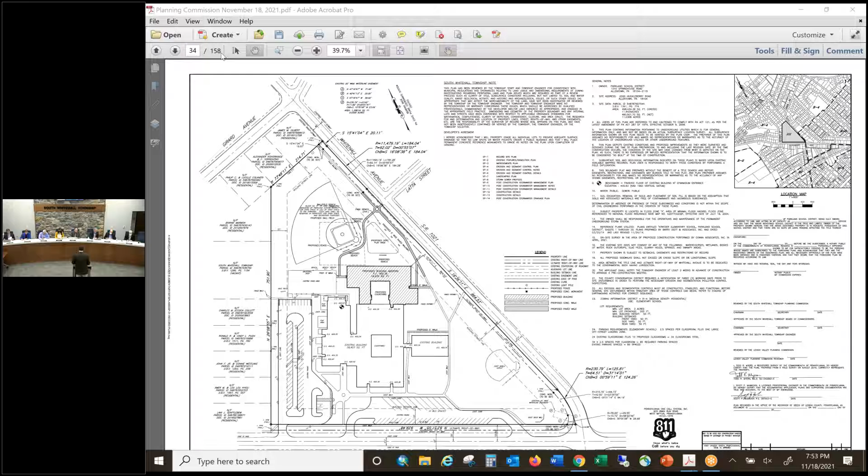Next, we will be doing Long's Water Technology Major Plan 2021-106, request for preliminary final plan review. And we'll start with the staff presentation.

This is an application to further develop the property located at 1567 Hausman Road. The plan proposes the razing of all existing structures on the lot and the construction of a 5,600 square foot commercial building, a 14 space parking lot, and associated stormwater management facilities on the 1.2833 acre lot. The subject property is served by public water and sewer and is zoned highway commercial.

Carroll and Warwick Inc. is the owner, and Long's Water Technology is the applicant. This plan was reviewed at the September 16th Planning Commission meeting. There was a prior plan approved on this, Major Subdivision 2007-108 Long's Water Technology, all the way back in December 3rd, 2008.

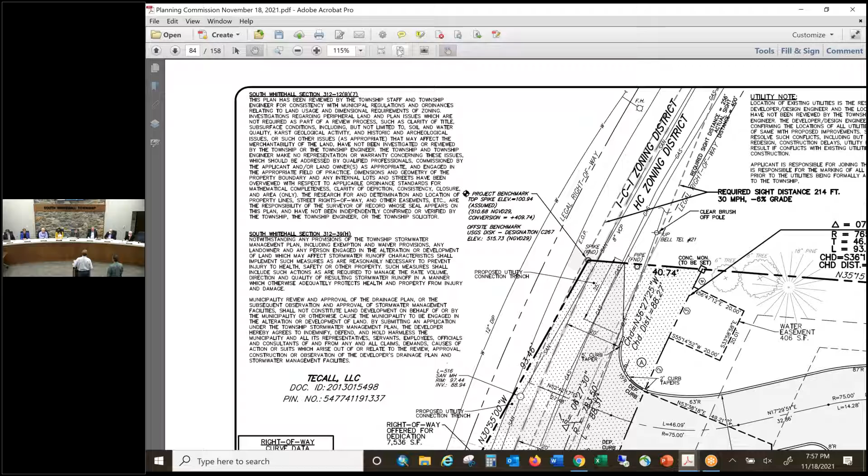You might be aware of that property. We had it under agreement of sale with somebody else who wanted to do something else there. Fortunately for us, that did not go through. I think that our business would fit into that neighborhood extremely well.

It's a much smaller plan. We've known that neighborhood for a long time. Everybody around there knows us. A lot of them are our customers. So it's really a perfect fit for our community, for South Whitehall, for our business. Most of our employees are very local. A lot of them are Parkland grads. We bring people out of the vo-tech. Very nice for the vo-tech kids.

We want to stay. What I'm trying to say is we desperately want to stay in South Whitehall Township. We have a very, very small window to build in there. From a year from now, we cannot be on that property anymore. Not being able to go here will probably, I don't know what will end up for us, where we'll have to go, probably out of the township. I don't want that to happen. And then again, we would have to sell this property, and I don't know what South Whitehall would have to face in the future with that property as well.

So there's a very small window. So tonight's decision, I can't tell you how important it is to us to be able to move forward and get this done. Like I said, I know there's some people here tonight from the area that are behind us, and we would really like to get in there and get that done. We have less than 1 year. I think that covers basically what I wanted to say. Thanks, Sam.

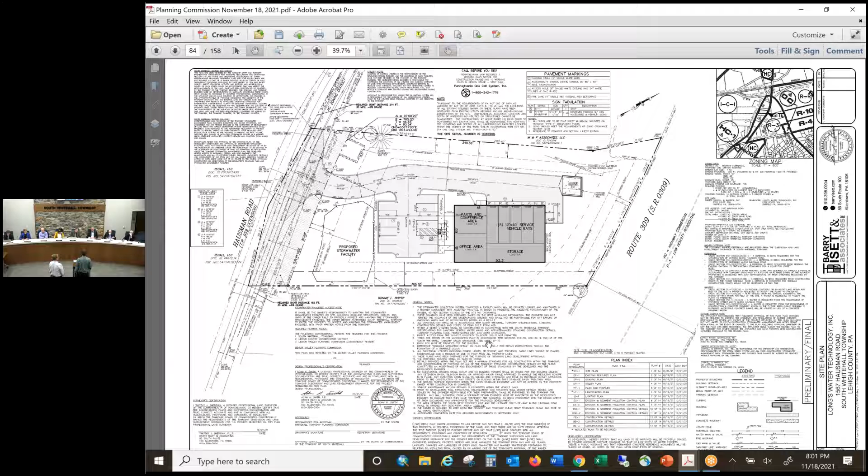We did meet with Greg, Tony, Herb, and David to discuss the project yesterday. They explained that those two main reasons were that our stormwater discharge needed to be angled farther downhill, downstream, as it leaves the property. And also that we put together a future improvements plan that shows where the sidewalk would go and the road widening and the curb and how all that would work with the current plan, that everything would be planned in the future. We did not show how storm sewer would discharge in the future.

Tony asked us to put a plan together that shows if it could work. After that meeting, Jim and I went to the site, looked at the existing conditions, put a plan together showing that discharge, and we sent it to Greg and to Tony for their review, showing that it would work. So I'm confident that we can work with township staff and with the township engineer to address any outstanding comments.

I won't speak for Tony and how he feels about the plan that we sent to him, but I respectfully request conditional approval tonight, conditioned upon, of course, meeting any outstanding comments. I'd be happy to answer any questions you have.

When did you send that plan to Tony and the staff? 9 a.m. this morning. So 11 hours ago. 11 hours ago, yes, sir. And really the purpose of the plan was just to show this is the route that storm sewer could take off of the site to discharge, that there was a feasible option.

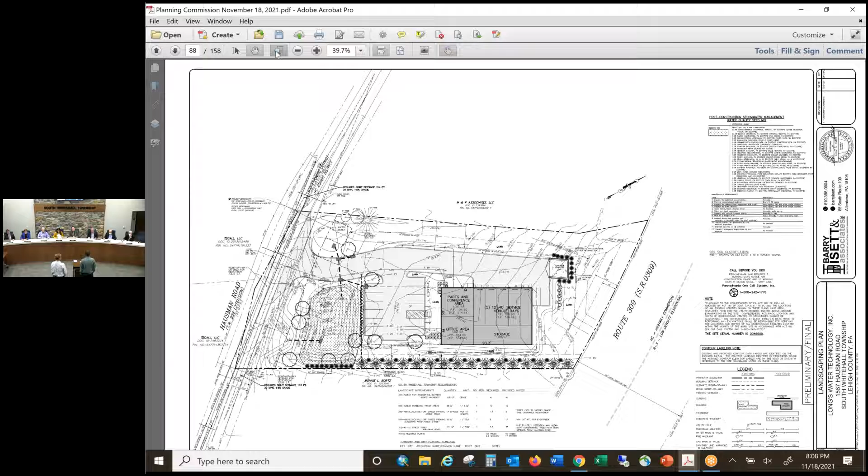So in general, is the planning commission essentially favorable to the plan, the concept, the waivers, as long as the downstream stormwater issue is acceptable? I would say yes, waiting on the engineers. Unfortunately the plan was submitted this morning; we would have had another week and it would have made our packet, and we could have a different conversation this evening.

But I can't speak for the others, I'm very in favor of this project, just getting it vetted properly so we can make a good recommendation to the BOC. And that's where I am too. I think just getting those details done would work, and you know what the schedule is, so work with that.

Any comments from the audience? This is just for this project, just in case you... And to be fair, I'm concerned about your neighbors to the south, and I want to make sure everything works as well, because we're talking stormwater here, so I'm just cognizant of that. We did go over the plan with them. Okay, good, great, thank you.

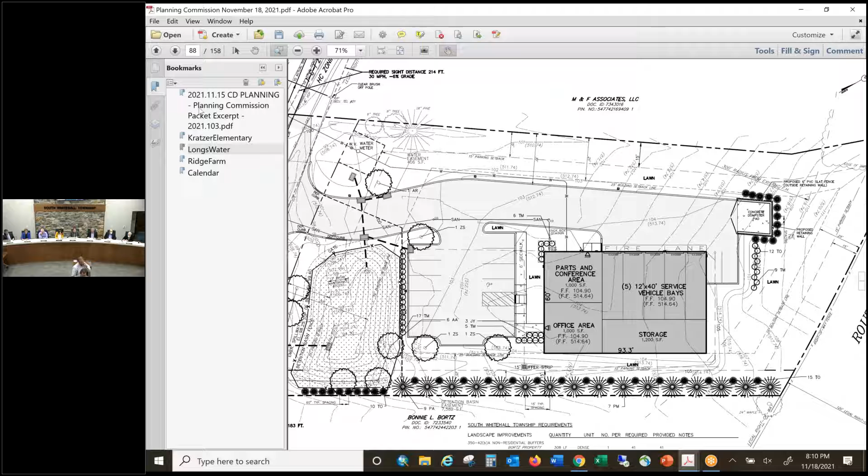Thank you. All right.

The third item today is the Ridge Farm Final Phase Plan, Phase 1A, Major Plan 2017-101, a request for final plan review. Greg will have the presentation. This is an application to develop properties located at Huckleberry Road, pin 548746422139. The plan proposes one 30,000 square foot medical office building, construction of approximately 265 linear feet of Road F on the north side of the Walbert Avenue Office Center Road intersection, construction of approximately 240 linear feet of Road G and the driveway onto Walbert Avenue, construction of the entire commercial village Main Street, right-of-way improvements along the entire northern frontage of Walbert Avenue east of Cedar Crest Boulevard, and along approximately 515 linear feet of the eastern frontage of Cedar Crest Boulevard north of Walbert Avenue, and associated stormwater management facilities on the 9.15 acre portion of the 111.1787 acre tract. The property is zoned R10 and TND Residential Cluster Overlay District and is being developed as a TND Residential Cluster Overlay. Walbert LLC is the equitable owner and applicant.

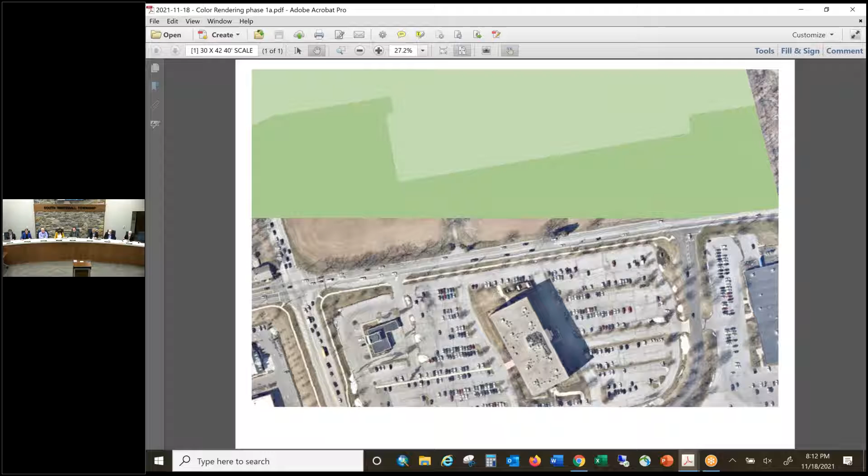Good evening again, Jason Engelhardt with Langan Engineering. As Greg spoke about a moment ago, this is the first submission of a final plan for phase one, what we're calling phase 1A. This represents 9 acres of the 138 acre traditional neighborhood portion of the project.

The idea here is to begin on the priority corner and streetscape of the project—to begin the streetscape, the main entrances off of Walbert, construct the entry plazas, develop the main street, and set the tone of the project. That tone will also be set with the gateway at the intersection of Cedar Crest and Walbert, and a thoughtfully designed medical office building that Spillman Farmer has been working on for a number of months. So again, set the style and tone and architectural elements of the project, and develop some of the initial plazas, so everyone gets a good sense of what we're doing.

Part of the intent too is to come in with something relative to the overall scale of this project that was a little simpler to understand and review, so we can get through the final stage and under construction fairly quickly.

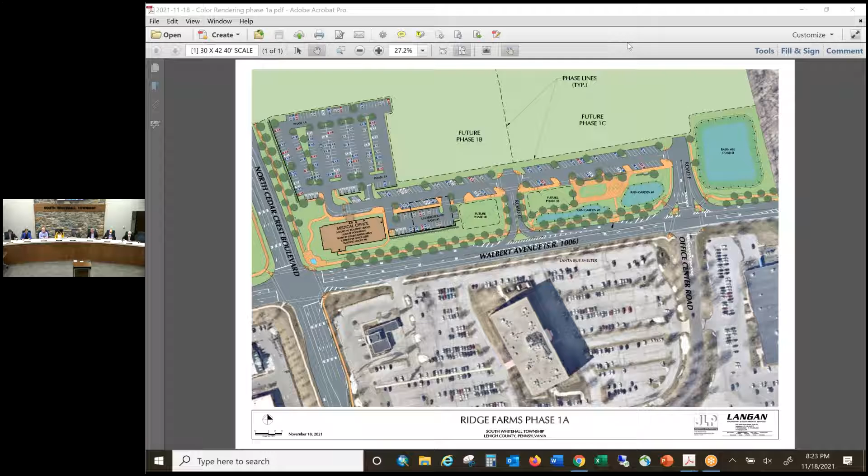Good evening again. As I said last time, we've hit the paving window and the plants are closing down, so no wearing course can be placed because of the time of year and temperature. Right now, one thing we're doing for the township is working on getting all the roads that get dedicated to the township put on the PennDOT map. That lets Public Works submit for liquid fuels funding to get more money for those, so we're working on that with Public Works. Additionally, there was an article in WFMZ recently about 380 million dollars over 5 years being added to the region. That's definitely a benefit. The article specifically mentioned the widening of Route 22, and specific to this township is the Tilghman Street interchange. Hopefully that project gets pushed through and funded correctly, and we can see the benefits of that improvement in our township.

Thank you, Tony. Agenda item number 6 is the comprehensive plan update. Anything else? Any questions on the comprehensive plan?

Agenda item 7, the 2022 meeting dates. I think we have them. Last meeting you said everyone was fine with the third Thursday of every month, just want to confirm that before it goes to advertising next month. I believe there were no conflicts with holidays. So they will all be advertised as the third Thursday of the month for next year. The comprehensive plan meetings will be the Tuesday after the first Wednesday, basically the week between the Board of Commissioners meetings. Greg, are you going to go advertise those as well in a block? Yeah, in the paper, and then of course it'll be on the website as well. Very good, thank you.

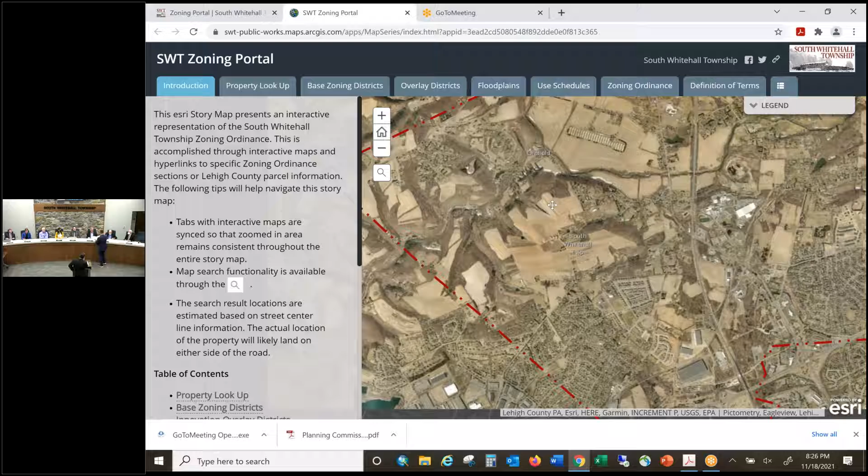Enough. I will not need one because the conflict solicitor is not here tonight.

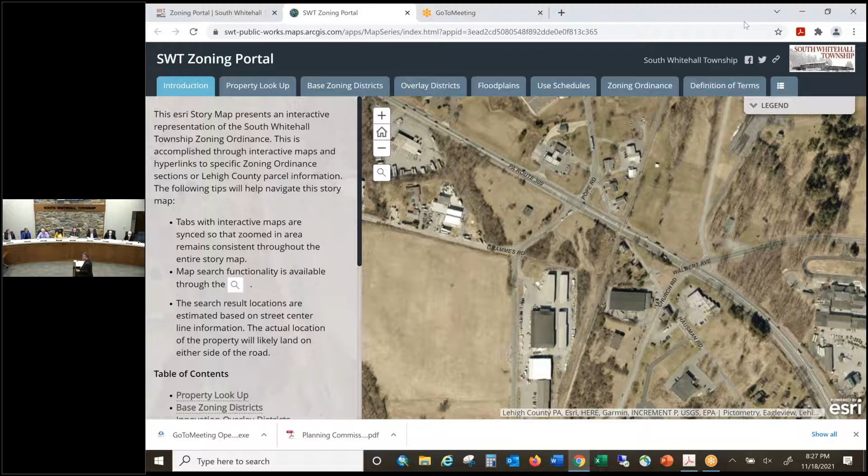So this is the new plan. As you can see, there's been a slight change—it's now just proposed to be the Wawa. What that lets us do is eliminate a fair amount of the setback relief, and in fact I think we're down to none; all the parking spots comply now. We've shifted the driveway on Chapman's a few feet. We've left it on Chapman's, but I wanted Pete to tell you what he's done with PennDOT at this point, because we did listen to your comment last time and took that into account. We've submitted the scoping application to PennDOT, which includes two plans—one was part of that submission, and one was emailed the next day. We're showing this concept in front of you with this driveway location. We also shared with them a layout where the driveway essentially attaches to Grammes instead of Chapman's.

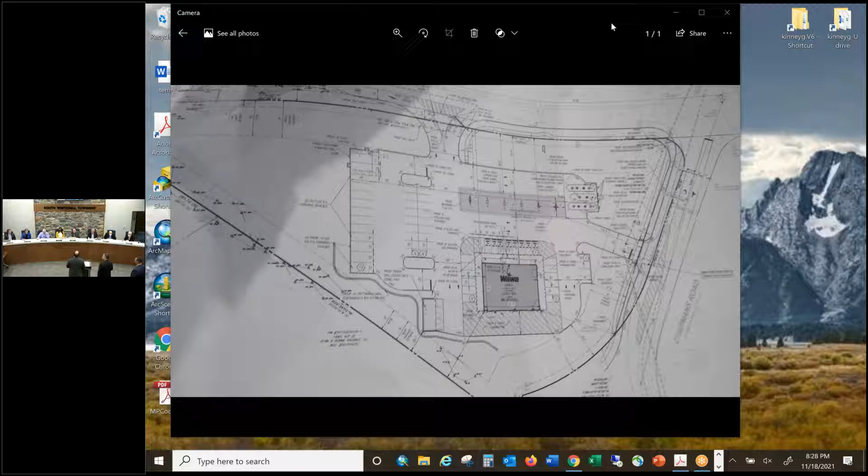Having said that, we're waiting for PennDOT to respond. I've had a number of emails back and forth with Brian Boyer. He doesn't have time to give us a review in time for this meeting. Hoping he'll have something for us before our zoning meeting on Monday, but I don't have a guarantee of that either.

The quandary we face is that we can only go so far without knowing whether the Wawa is approved, because part of our application requires a special exception for the Wawa. So we're going to go to zoning and request a special exception. We're going to leave this driveway here with an explanation to the zoning board that we're seeking relief for the separation distance requirement, but understand that ultimately it will be wherever it works out in land development and with PennDOT, be it on Grammes or the one we show on Chapman.

We think that's an appropriate way to proceed, because South Whitehall is somewhat unique in that this requirement is virtually identical in both the zoning and the SALDO. And yet here we are with state roads, so we're subject to PennDOT jurisdiction.

We're chasing our tail a little bit, particularly because of needing the use relief. We'd be in a different situation if the Wawa was permitted by right, because then we'd just be here following the normal course. But we were uncomfortable going too far before we got the special exception for the Wawa. It doesn't make sense to not at least broach the driveway at zoning, but we wanted everyone to know that ultimately it's going to be PennDOT's decision.

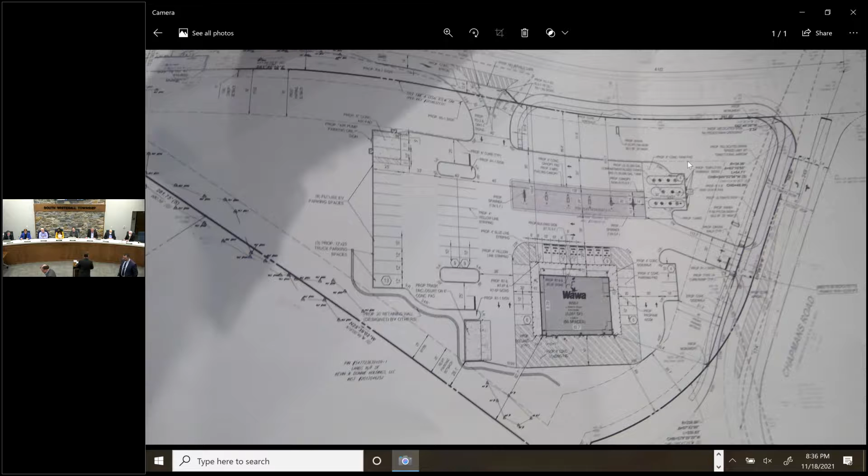December Planning Commission meeting - I believe they are intending to submit plans on Monday for the December meeting. We also have a new project coming, the Dorneyville Shopping Center Fast Casual Restaurant. It'll be a pad site in the Dorneyville Shopping Center parking lot close to Hamilton Boulevard, a small fast casual restaurant with a drive-through.

Is that like in front of where the chicken lounge is, kind of? Pizza Hut, that corner? Ish, yeah. Okay, and the Wawa that we just saw, the Wawa, yeah. And that's it? Just two? Well, Long's Water, if they can - yeah, Long's gonna attempt to get in on, so that would be three if they make it.

I believe they'll make it. And Ridge Farm is not looking like it. No, they'll take a month and digest our comments. I believe they plan to come back in January. Okay, all right, so next month: Dorneyville Shopping Center, Wawa, and Long's probably. Yes.